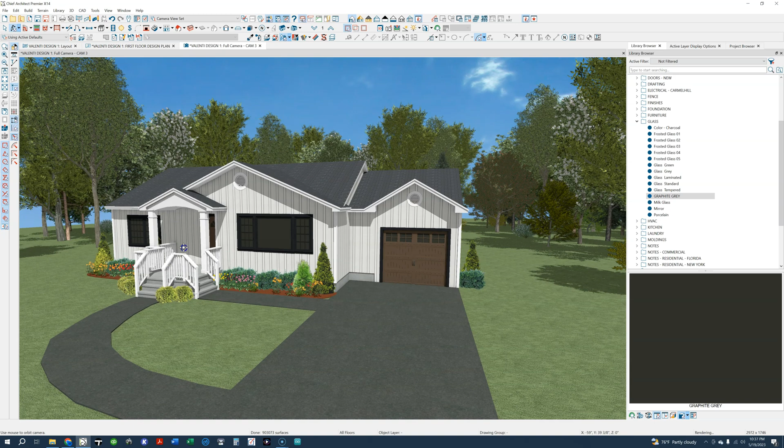One thing I want to point out here, I originally intended for the front porch to have this ramp going, to be flush off of this top step and then regraded down to meet the driveway here. This was going to be just a regular walkway going up to these steps. So it would be a pretty steep regrading down to this point. Maybe have this go up to the second step. The point being was I wanted this to be a handicap ramp.

One thing this program does not do well is terrain mapping, where I'd be able to have just a regrading of this area here going up as a handicap ramp up to the stoop. So as much as I want to show it to you, I tried it for an hour and a half and it just keeps coming out god awful.

Just keep that in mind, that I'm thinking this path should start up here and then work its way down. It'll require a lot of regrading of the front lawn, but you don't have to do the entire front lawn. It only has to be probably like 3 feet to the side this way and maybe 3 or 4 feet to the side this way, and regrade down.

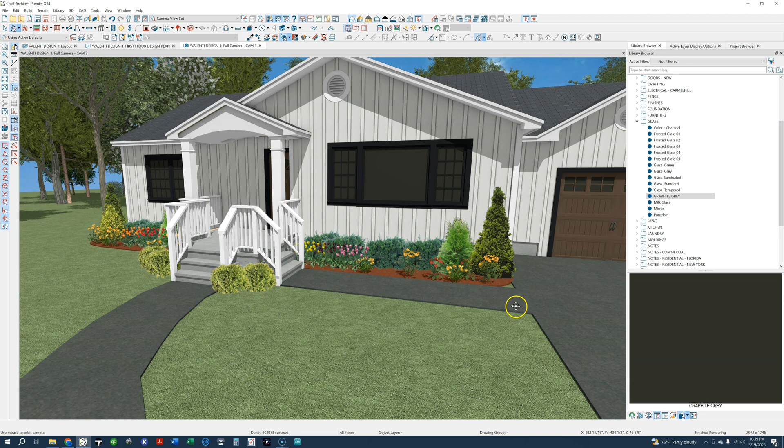Or you only do that when the time is needed and he's really in a wheelchair and you need to have that wheelchair accessibility. You could also, instead of regrading the front lawn, just have a handicap ramp come down from this side, get rid of the stairs, have a handicap ramp come down the side and stop at the edge of the driveway here. So it's just a matter of which way you want to approach it.

I added the 2 gables, the vertical board and batten, and the black window frames and sashes and casings. 1 gable over the garage.

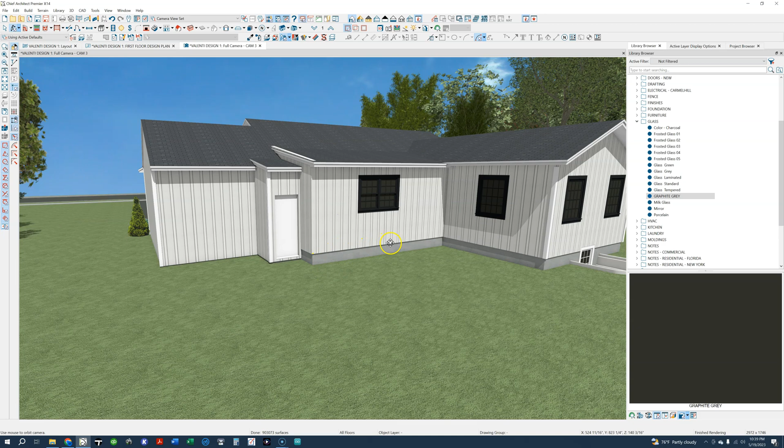And then we didn't really discuss the deck on the back. I wasn't sure if that was going to remain or we were taking that off. So that'll be on the next revision.

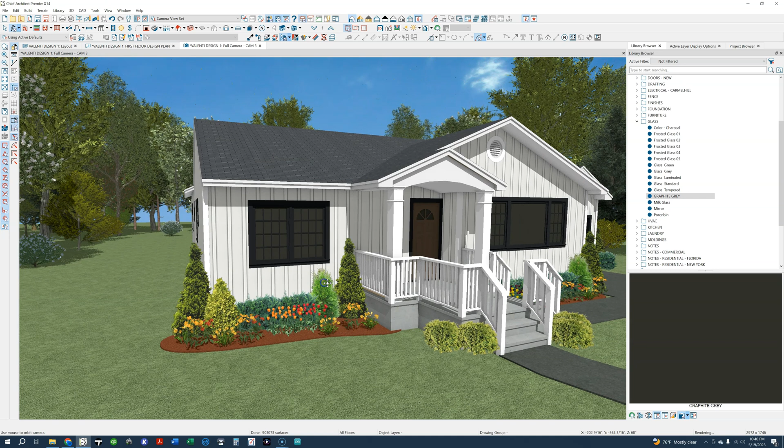And then I have the cellar entry where you have the Bilco door and stairs right now. It just seemed to be a given that's where you were going to put it. So this is the way the rear of the house looks right now. And keep in mind, first draft, still have some tweaking to do to this.

Then let's go to the floor plan. A couple of minor things I changed. Let me just make a minor change here. There should be a door here for this linen closet.

Okay, so couple of things I did. I tried to save as much of the walls as possible compared to what you had on the proposed plan and what is there existing. You had originally, I think this was pushed forward or back or something, and it didn't line up with anything. There was no existing walls to remain that were part of the original structure, and this is the line where the existing ceiling joists go front to back and overlap over this existing wall.

Obviously, we want to take this out to open up the room, so this is going to be a large microlam or a flitch plate or a steel beam going across, but I needed to have something. I couldn't just have it clear across the entire house going to this point. So there'll be a beam in the ceiling here, beam in the ceiling here. Made this a little bit different than your floor plan.

I also changed a couple of doors where I thought it was required. You had swing out doors here. I felt they'd conflict with the swing of the front entry door. Same thing over here. I made a minor change.

You had double doors, I think, going into this walk-in closet. I changed it to a single. I moved this down a little bit and shrunk the laundry room front to back.

I added this folding counter because I wanted there to be more space on this wall here. So bringing this down created more wall space because the oven was on a very short wall. The oven originally was shoved into the corner, and all this space back here in the back corner of the

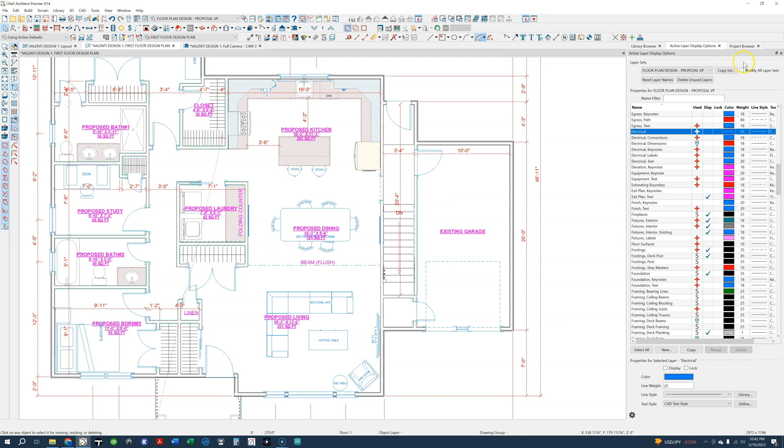Okay, so this is the interior. This is what I'm thinking your kitchen is going to wind up looking like. Now you can decide if you want to have the microwave above the stove.

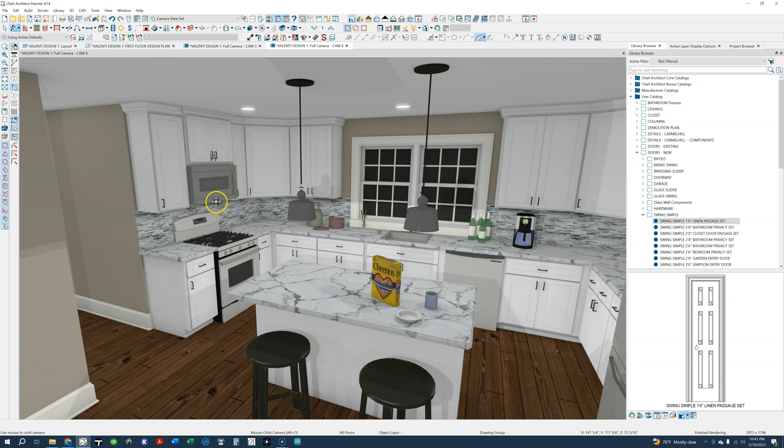I don't know why I used this particular stove because I don't like having the back panel. I usually like to have it flush against the wall. But some people like to have the microwave built into the base counter on the island. So it would be right here.

I personally, and this is the older way of doing it, like having it above the stove because you also have the ventilation fans underneath. And also I like having the numbers at eye level for the controls. I don't like putting it down here where you have to bend over to see where you're

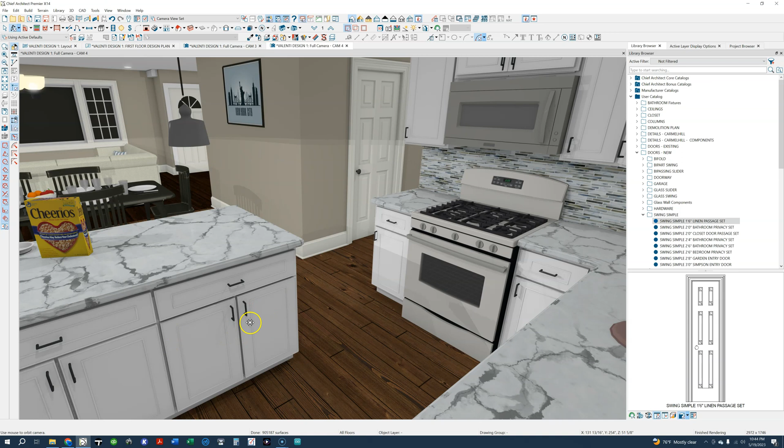putting it in and out and bend over to punch the numbers in. So I'm not a fan of the new way of doing it, and I think more about my back hurting me all the time. That's the way I was looking at it. So this is the preliminary layout for the kitchen.

And then this is the... I didn't see the two different types of floor material. That will really drive me crazy if I don't fix that.

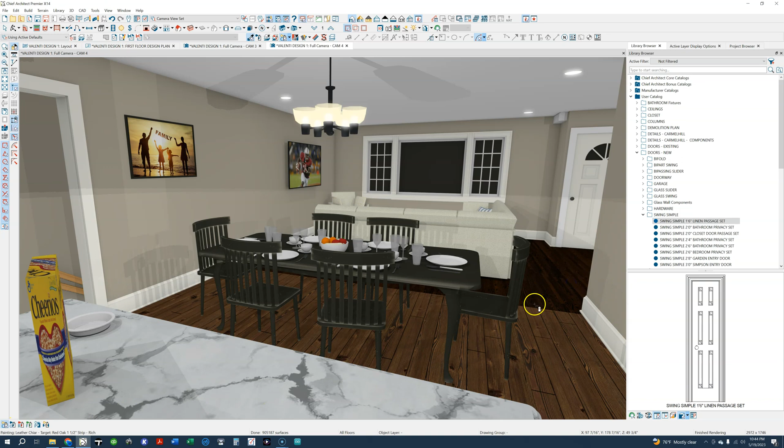Okay, and then this is going into the living room. Big screen TV mounted on the wall. L-shaped sofa, armchair in the corner.

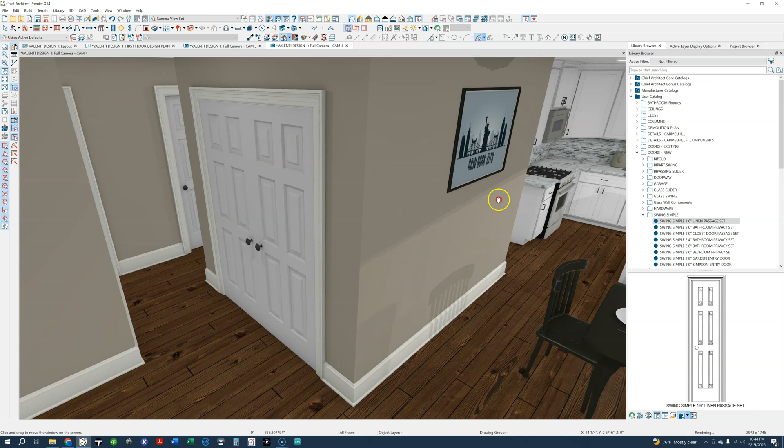And I didn't do any modeling of the bathrooms. I didn't think it was necessary. Usually I just concentrate on the kitchen.

And then if I was to show you what the kitchen would look like with a little bit better rendering. Okay, so this is the computer rendering with a little bit better settings. It just takes a minute for it to develop.

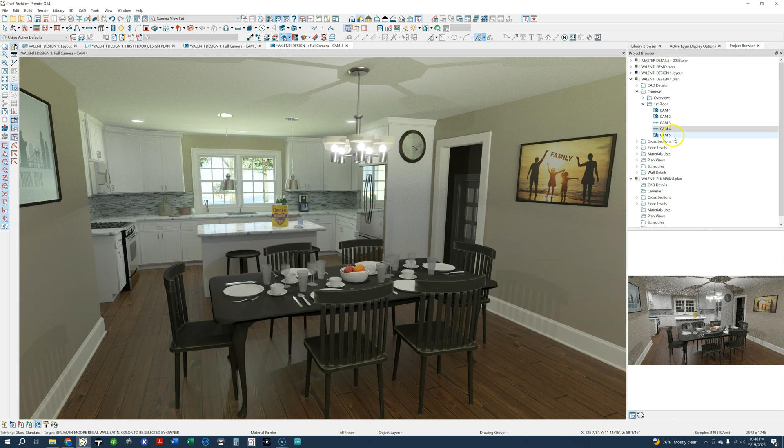And then I also have one more rendering, and it's on the website as a still rendering. This is a rendering from the opposite side, on the garage side of the wall. Okay, and this is the rendering from the other side by the garage entry door.

All right, so let me know what you want me to tweak. I see a couple of things that I already need to fix, but they're really just rendering issues. Give me some feedback, and we'll make the next round of changes. Probably wait till after we get your survey to make the next round of changes for the design.

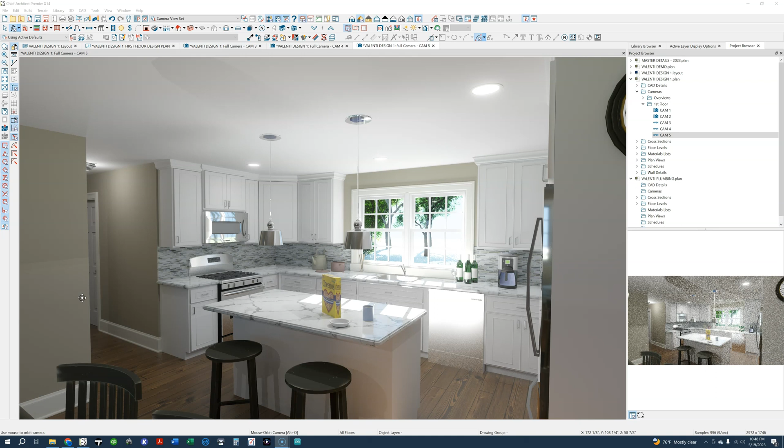I also have, let's see, floor plan, renderings, and rendered elevations that you can look at. All right, and let me know about that deck, what we were doing with that deck on the back of the house. And also, obviously, let me know if I missed anything.